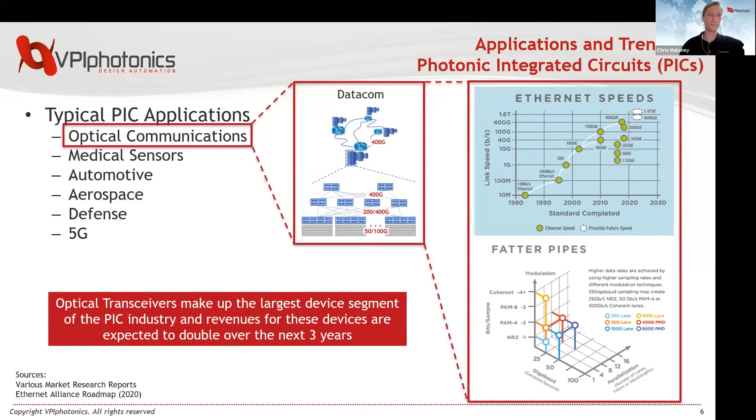One of the main EPDA challenges in supporting the PIC ecosystem, as outlined by the Integrated Photonic Systems Roadmap, is that we need to improve the maturity of the foundry PDKs. This requires an orchestrated effort between foundries like Infinera and software vendors like VPIphotonics. Foundries should be implementing more of their design, process, and test information into PDKs, which is exactly what we've done here, and at the same time be working with the software vendors to improve tools and flows to support design for manufacturing and improve yield and cost.

We like to think of our collaboration between Infinera and VPIphotonics as in phase, so we're constructively interfering with one another. Both of our companies are domain experts in optical communications. Infinera is very vertically integrated with systems and networks, and this domain has been VPIphotonics' bread and butter, if you will, for over 20 years. One of the most important things that makes this partnership work well is our focus at the circuit and the system level. This enables fast and simple simulations for PIC designers. If you're a designer, you don't necessarily need to know the device physics behind each and every component.

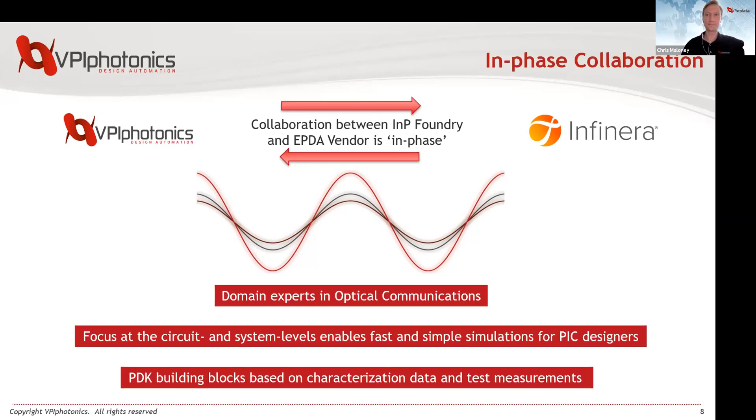So now that you have some background on what motivated our partnership, I'd like to turn things over to Dr. Gloria Hoffler, and she will discuss a little bit more about the Infinera indium phosphide PIC foundry and discuss how you can get involved there. So with that, I'll stop sharing my screen and turn things over to Gloria.

Thank you, Chris, for that kind introduction. Let me now give you a little bit of background first on Infinera, and then describe our PIC capability. All right, there you go.

So we are Infinera, a US-based optical network communications company. We're founded in 2001. Our optical network solutions address very diverse markets, ranging from subsea and long-haul, metro, and access. And our products have a global reach with tier 1 service providers, internet content providers, enterprise verticals. We have over 2,000 patents in a portfolio.

And our commercial success is really in large part and continues to be due to the high degree of vertical integration that we have. As a business, we are organized to leverage synergies of these multiple technical competencies that we feel are necessary to deliver high performance and reliable optical engines for different markets.

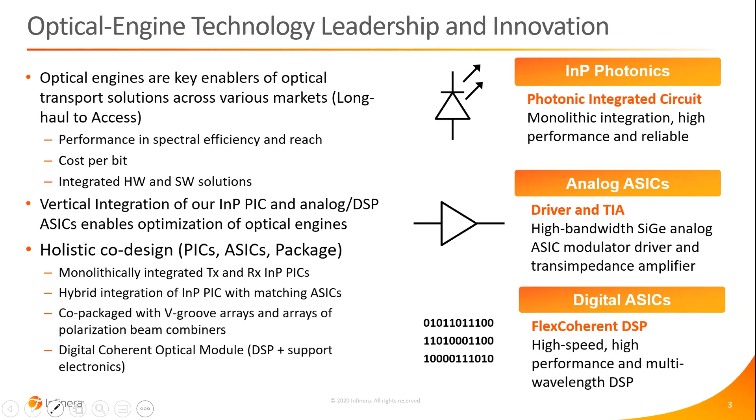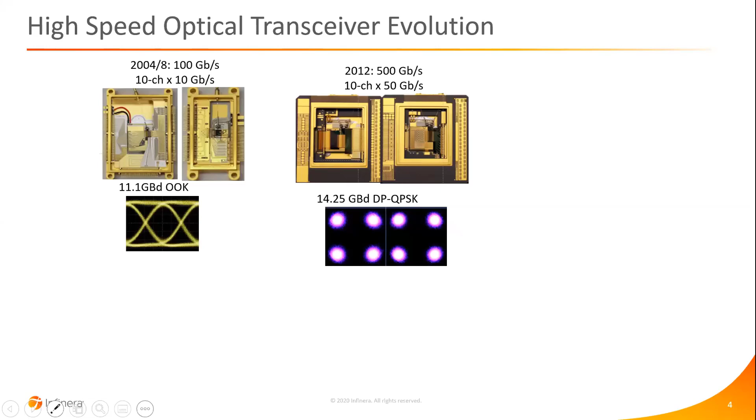So if we look at the evolution of our transceivers, at Infinera, we have pioneered the use of large-scale photonic integration into the network since 2004, starting with a 10-channel, 10 gigabit module. And then as we moved into coherent modules, we integrated 50 gigabit 10-channel modules and deployed those into the network. And these had TX that integrated over 600 functions monolithically on an indium phosphide chip.

So by continuing to increase the baud rate and the modulation formats, as Chris showed earlier, to achieve these larger pipes, the density of the integration of our transceivers really increased. In 2016, we demonstrated a 1.2 terabit module with a 200 gigabit per lambda PIC, and then went on to demonstrate 2.4 terabits with 600 gigabit PICs in 2019.

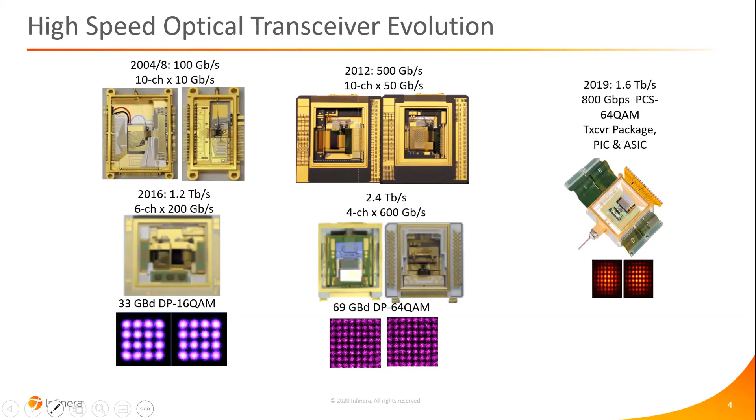And then most recently, our latest optical engine, which is 1.6 terabits. And these are 2-channel PICs, which for the first time integrated all the transmit and the receive optical functions onto a single indium phosphide chip. And each channel is running at 800 gigabits per second.

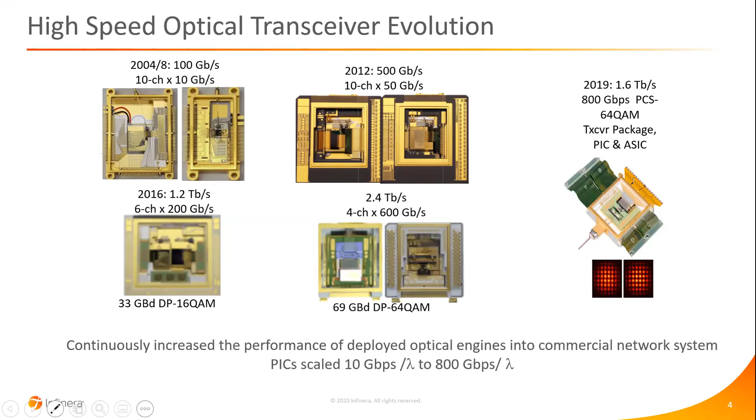So these PICs are developed in a commercial fabrication line, and that fabrication line is now also accessible through a foundry capability. And so the same fabrication line that produces these leading edge commercial PICs was tailored to provide the foundry PDK that you'll hear about today. The development of the integration platform at Infinera is very similar to the development of electronic ICs.

We start with the manufacturing capability, and once that capability is mapped out, we put in place fab processes with very tight CPKs and use end-of-line tests from the product lines to correlate performance and verify the design rules. SPC metrics are used in all the product lines. Process capability is also used, and this is a measure of the repeatability and consistency of our manufacturing process. These capabilities are tracked and controlled to deliver high fabrication yields and meet performance metrics.

Over 90% of the processes have CPKs larger than 1.33. We've reported many times yields over 90% on our wafer fab production lines.

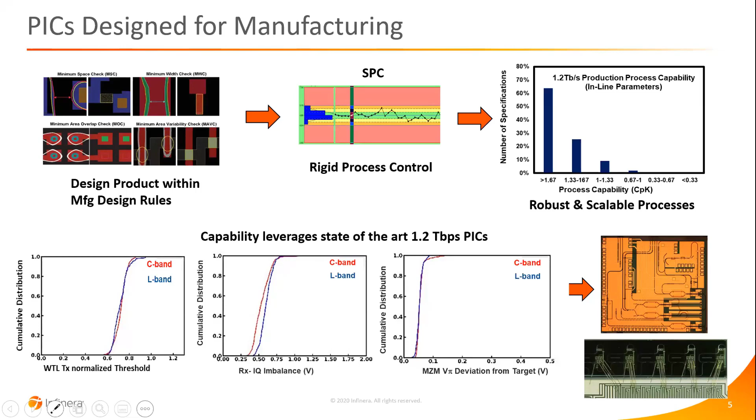Beyond the process design rules, we also need to look at the scalability of the process. Improvements in the fabrication capability have reduced the density of killer defects, which enables the integration of PICs with larger and larger complexity and a number of functions. This is really important, as if you think of a PIC yield, the yield is not just determined by meeting the performance of a specific channel metric, but it also needs to perform across all the different channels.

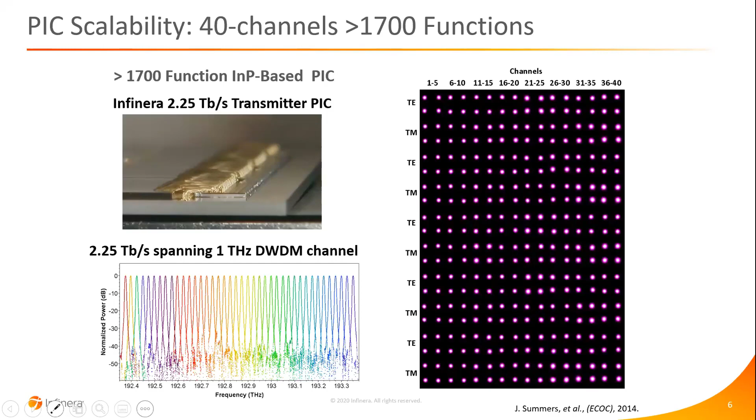To demonstrate the performance on the channels, I'm showing this QPSK constellation, and you can clearly see the TE and the TM constellations for all 40 channels. This is a 2.2 terabit capability 40 channel transmitter that's been all monolithically integrated in indium phosphide.

So let me now highlight the components of the PDK and the capability of the integration platform. We offer lasers that are fully optimized in the platform. These components are all centered at 1550 nanometers. The DFB lasers can run CW or directly modulated.

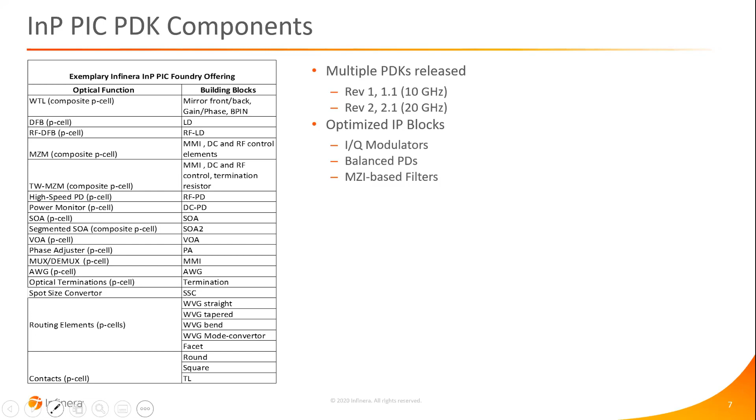We also have in the kit DC and RF photodetectors. The first release operated at least at 10 gigahertz, followed by a second release with a capability of 20 to 25 gigahertz. We offer on-chip amplification, power and phase adjusters, and a 10-channel AWG, all integrated in a low-loss optical integration platform. What you see here is a micrograph of the chip, the wafer payload from one of our MPW runs. As I mentioned before, we use a system-centric approach to design all these components.

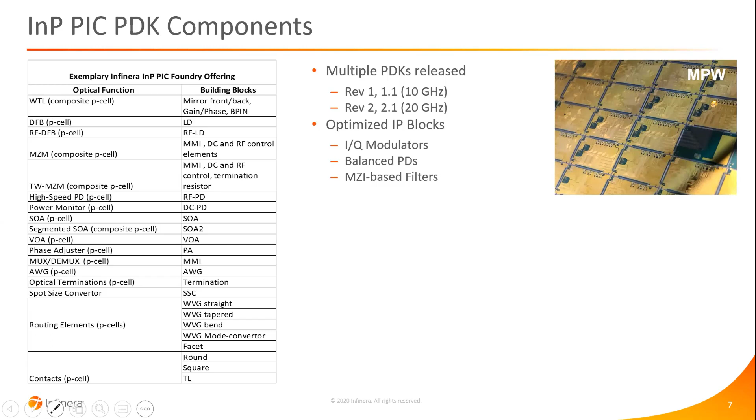These are components that are compatible with off-the-shelf electronics and assembly requirements. They're also really intended to operate as best in class, so they stand out well when compared with standalone components. This particular laser is a widely tunable laser that came from a verification chip that was embedded into the MPW, and the line width is 200 kilohertz. It's comparable with standalone widely tunable lasers.

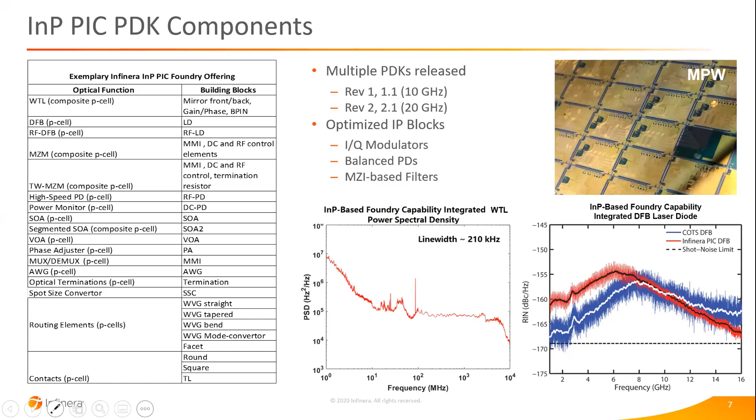We've also collaborated with external groups to test some of our components, and I'm showing here the RIN characterization from an integrated DFB laser. The comparison here is made between a commercially available off-the-shelf DFB that is typically used in RF photonics and the Infinera laser. The commercial line also provides a wealth of statistical data to build compact models. Eugene will be describing that after my talk.

To enable this turnkey capability, we partnered with VPIphotonics, which helped us chart a path for allowing users to prototype and move on to commercialization very quickly. We developed the infrastructure to maintain the foundry line in our commercial fab and use design automation to perform simulations and PIC layouts. We've generated data to build compact models derived from the foundry, not just based on our foundry runs, but also on statistical distributions from our commercial lines.

Interoperability is also really important between these tools, and that was part of the joint collaboration we had with VPIphotonics. This really reduces the learning cycles. Eugene will talk about the netlist export capability today, which allows us to take the simulated PIC schematics and readily bring them into a layout environment, in this case Cadence, allowing us to quickly move from simulation to layout to fabrication and delivery of the PICs. So I'd like to thank you for listening to the foundry capability, and really look forward to working with you in the future.

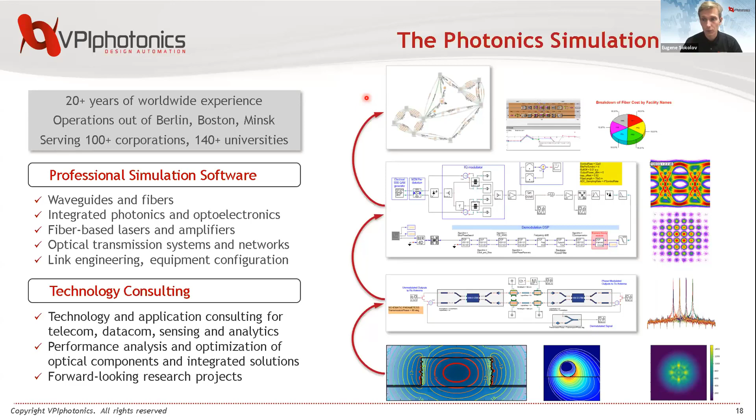We have a very diverse range of customers, among corporations, as well as universities and research institutes. We offer multiple software tools covering different applications and levels of abstraction, and you can see a few examples on the right. We start from waveguide and fiber design, going up to photonic integrated circuits and systems, and all the way up to networks. We also share the knowledge we've gathered over these years and take active part in several forward-looking research projects.

But for this particular webinar, we are going to focus on these tools: VPI Component Maker Photonic Circuits, and the extension to it providing the library of building blocks for the Infinera indium phosphide foundry PDK. At this level, one would have access to more physical representation and more physical models of the integrated photonics components, while another tool, VPI Transmission Maker Optical Systems, will focus on the entire optical systems. You'll see the difference in a minute when I show the demo.

But what's important is that all three could work perfectly well together because they share the same user interface, called VPI Design Suite. Now, if we talk about integrated photonics design, the main challenge is that we may have a very diverse set of basic photonics building blocks. Some of the models should be really advanced in order to capture all the effects, and there are other challenges too. We need to deal with both electrical and optical signals, and our signal propagation should be bidirectional, so that we can account for back reflections in our integrated photonics, or counter-propagating signals interaction, and so on.

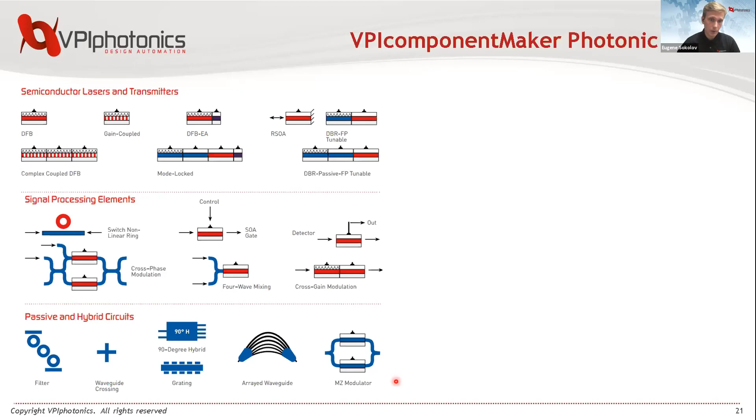So in order to address these and other challenges, we created the product called VPI Component Maker Photonic Circuits, and it can be used for a really diverse range of applications. As an example, we can see here a tunable hybrid silicon laser.

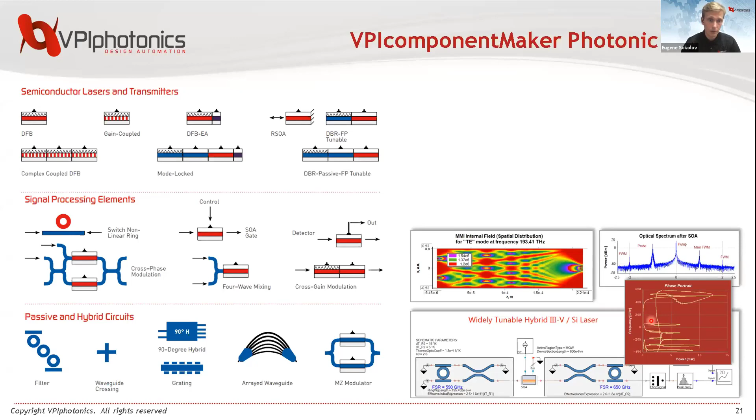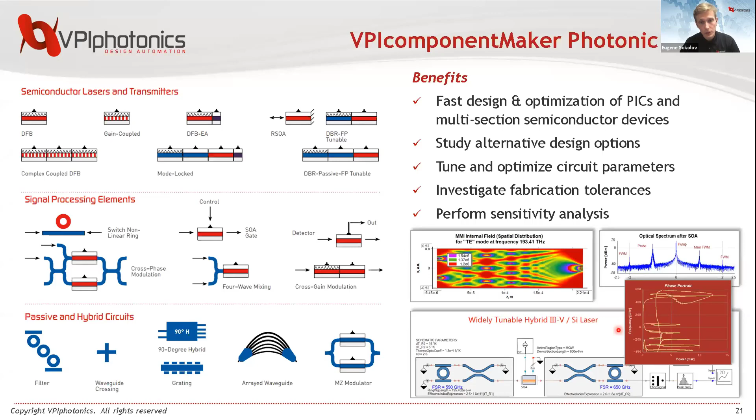It's also important that one can not only design and study alternatives of your designs and solutions, but also do design optimization of these devices and circuits to investigate fabrication tolerances and perform sensitivity analysis.

As was already mentioned today, one of the main trends and desires of the integrated photonics industry is to simplify access to design and manufacturing of PICs, and to lower the cost. This could be achieved by increasing design predictability and enabling very easy scalable design of highly integrated circuits, speeding up the design cycle and reducing time to market.

Following the paved path of electronic IC designs, foundry-specific process design kits are widely introduced to address these needs. So what is the PDK? In the first place, it is a list of optimized and predictable components which the foundry could fabricate. Further, the PDK contains corresponding compact models, and these models are fast, analytical, or behavioral models which capture the actual behavior of the devices fabricated on the foundry.

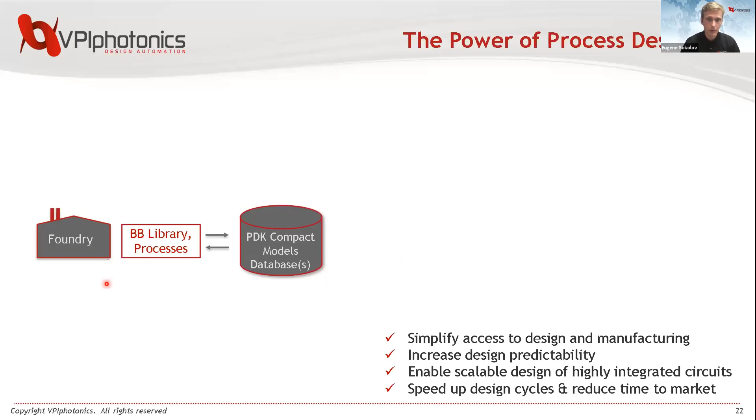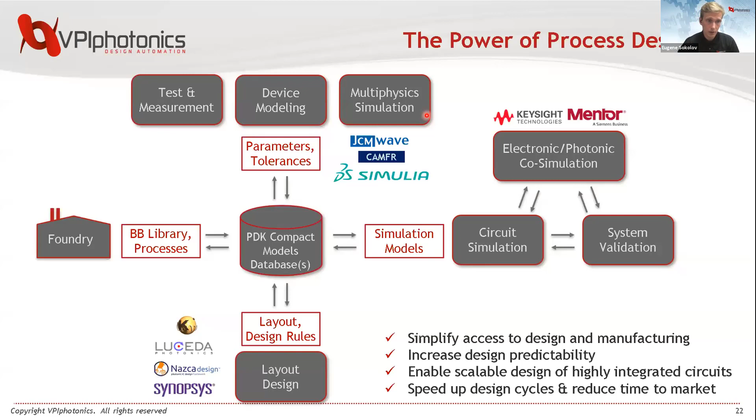Simulation models require the parameters to be set, and this information is usually delivered by performing device, multiphysics simulation, and by test and measurements. The models themselves are already implemented in some circuit-level simulation tool.

We propose a few tools which fit in this ecosystem. But what is most important is that this ecosystem proposes high interoperability of different tools. So what does it mean?

For example, you have a circuit or your schematic, and it could be quite easily converted into multiple layout tools, your favorite one, or just a netlist, as we will see in the future. Further, your circuit simulation could be combined with system or electrical simulation quite seamlessly. And depending on the task, all of these interfaces could be really important.

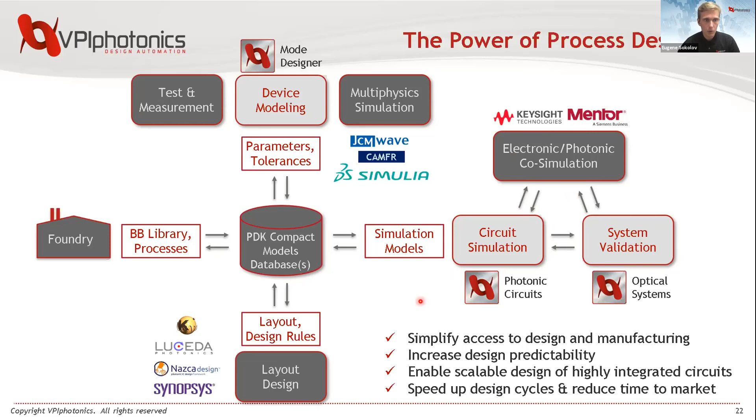Switching to how this ecosystem works, in the particular case of the Infinera PDK, we should note that Infinera Foundry does a tremendous job simplifying their customers' life. Infinera accurately performs testing and measurements of their devices, and we use this information to characterize PDK compact models.

In this workflow, users don't need to worry about their PICs layout—Infinera takes care of that as well. Passing your abstract design idea after simulation would be as easy as sending a netlist, which is automatically generated from your schematic.

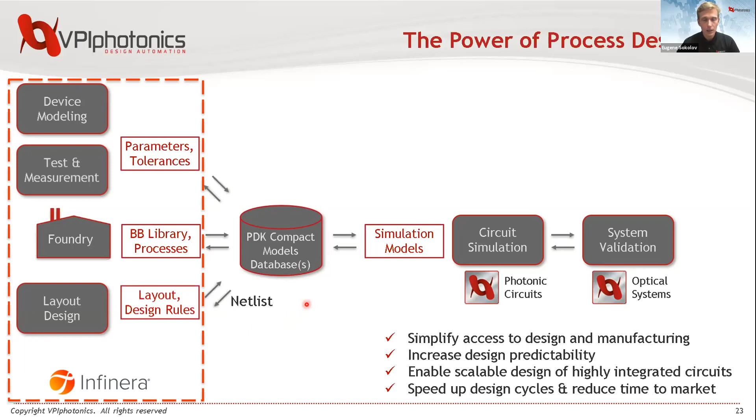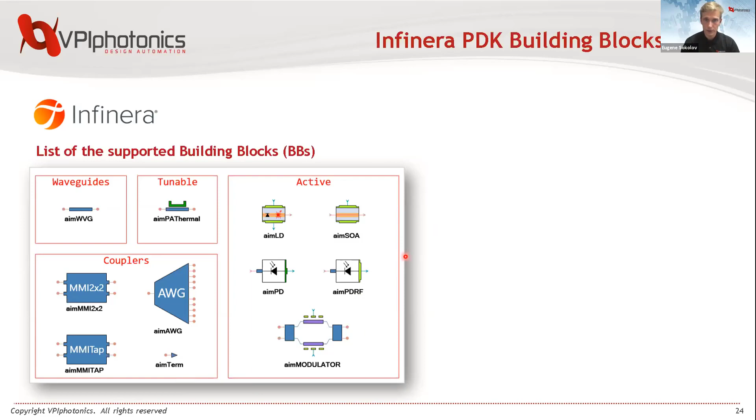We use our built-in system-level models and tune them accurately, and depending on the nature of the components, different methods and simulation models could be employed.

It's important to mention that using measured and experimental data is really essential, because we have more trust for more complex designs afterwards. One can also extend the library with their own custom co-simulation models.

Now let me give a few examples of how we characterize the simulation models. In a very simple case, the measured characteristics could be read pretty much directly. For example, passive devices are completely characterized with their scattering matrices.

As in the case of this arrayed waveguide grating, which is commonly used to multiplex or demultiplex optical signals at different frequencies, we can just read the scattering matrix in some specific format.

In other cases, the measured data could be processed before it is applied to optical signals in the simulation. As an example, we can measure the response of the RF photodiode and approximate it with an analytical low-pass filter. The parameters of this low-pass filter are calculated quite easily by a simple fitting procedure of actual experimental data. In both cases, the models are pretty straightforward and use foundry data almost directly.

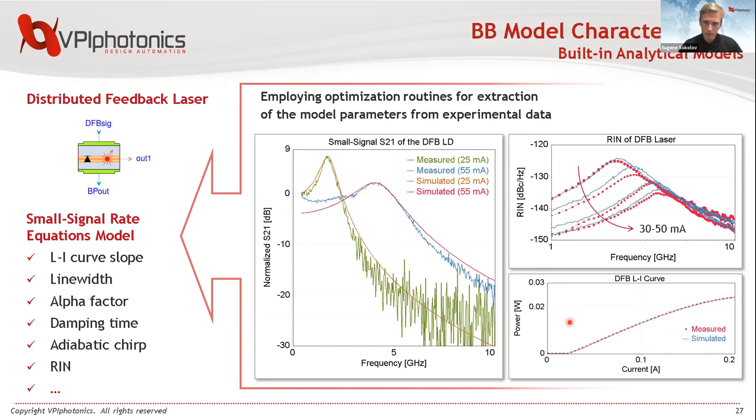So on the plots here, we can compare an LI curve for the DFB laser diode, small signal amplitude response, and relative intensity noise spectra. And we can compare the measured and simulated results. And again, even with more complicated procedures, the simulation gives us sufficient accuracy.

Shifting gears, let's see how all this works together in a live demo for a 16QAM system based on Infinera PDK building blocks. And for this purpose, I'm going to switch to VPI Design Suite. So to start with, let me introduce the VPI Design Suite interface and the main elements that we will be talking about in the next few minutes.

So VPI Design Suite provides a dedicated visual photonic design environment. And this allows you to create an abstract representation of your system or circuit, which we usually call a schematic, and run the corresponding simulation without any programming knowledge. So it's very easy. Any schematic consists of interconnected building blocks, usually representing different devices.

And on the left here, we can see the navigation bar where one can access a library with numerous modules, for example, providing the models for laser sections or for the integrated passive components. So we use these general purpose models to create the corresponding library of the Infinera PDK building blocks. And this library is also provided as an extension or toolkit, and it can perfectly work together with all general purpose components stored in this library.

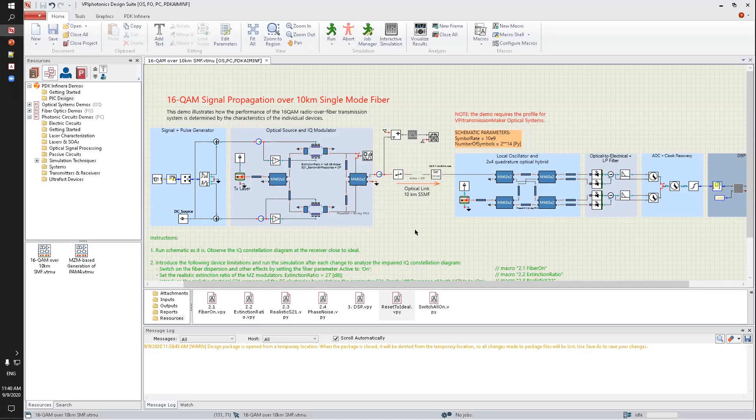So this is an example of 16QAM signal propagation over 10 kilometer fiber. And I'm not going to dive deep into the principles of quadrature amplitude modulation, or QAM format. Importantly, this system contains the typical parts of any optical link. So it has a transmitter, it has the link itself, usually represented by a fiber, and it has a receiver with some signal processing.

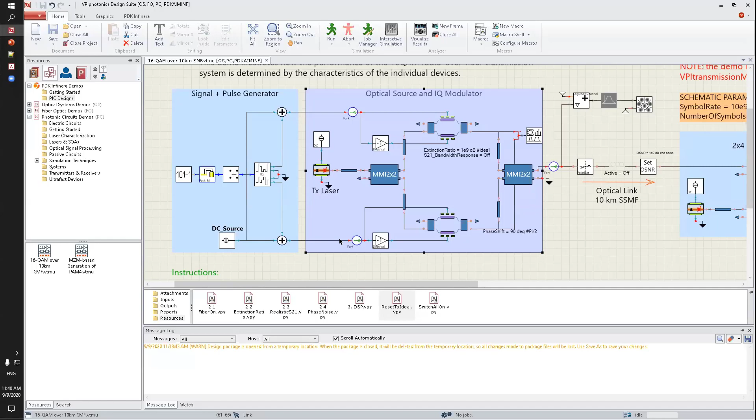So if we have a look at the transmitter, we can distinguish electrical and optical parts, and while the electrical part is represented by the general purpose modules emulating electronic components, the optical part consists of Infinera PDK building blocks. So let us have a little closer look at them.

And so here we have two bit sequences driving a dual parallel Mach-Zehnder modulator. So it's basically two Mach-Zehnder modulators, which are standard Infinera building blocks embedded into a main Mach-Zehnder structure. The continuous wave emission of the Infinera DFB laser is modulated by these modulators, and since there is a phase shift in one of the arms, we can form in-phase and quadrature data streams.

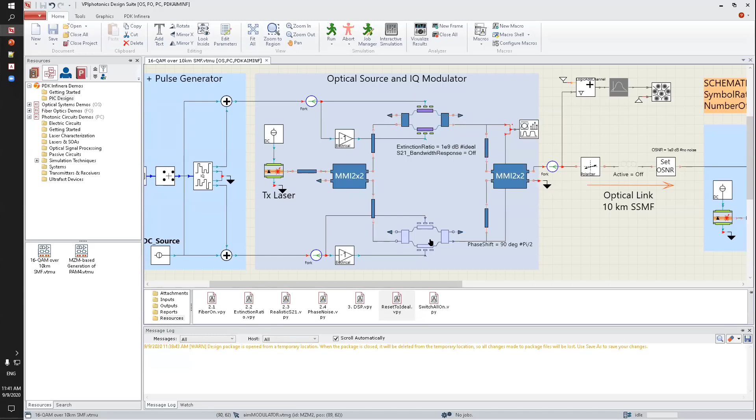So we can open the parameters of one of the modulators. And once again, since this modulator is part of the Infinera PDK building block library, the model is already pre-adjusted so that it reproduces the functionality of the real device. And because of that, there are very few parameters to control and to set up. And this is an advantage, because it makes it very easy to use such components.

So for example, we can control here the heating power, emulating the phase shift change in the thermal phase shifters. We can adjust the extinction ratio, simulating some fabrication tolerances, for example, and we can switch on and off some of the effects.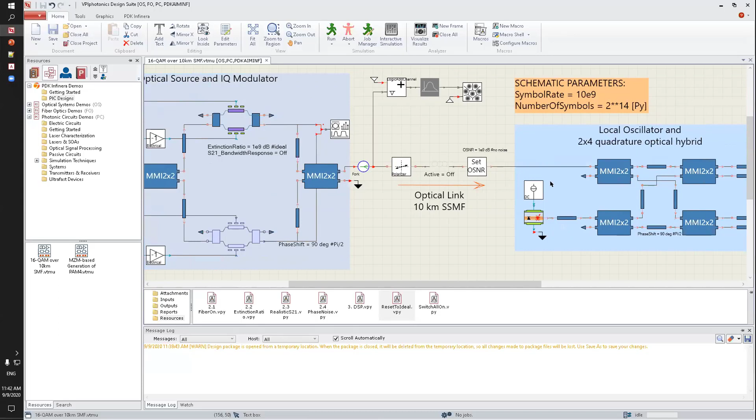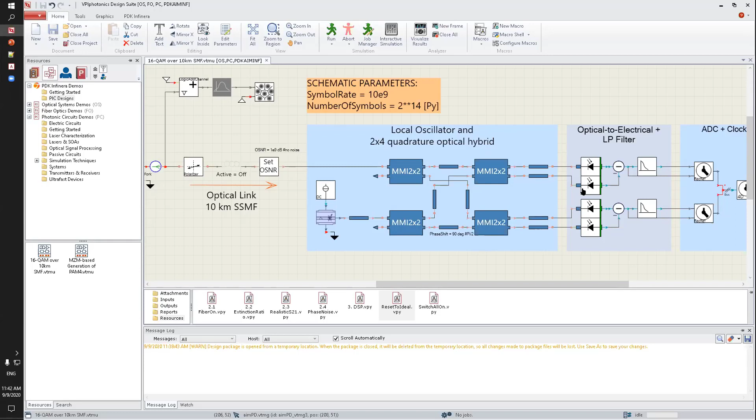So after some auxiliary modules here, we pass our signal to the fiber, and it is further detected in the receiver by superimposing the signal with the local oscillator emission in the integrated 90 degree hybrid. And further, the signal is detected in the photodiodes. And there are also some signal processing tools, which we will discuss a little later.

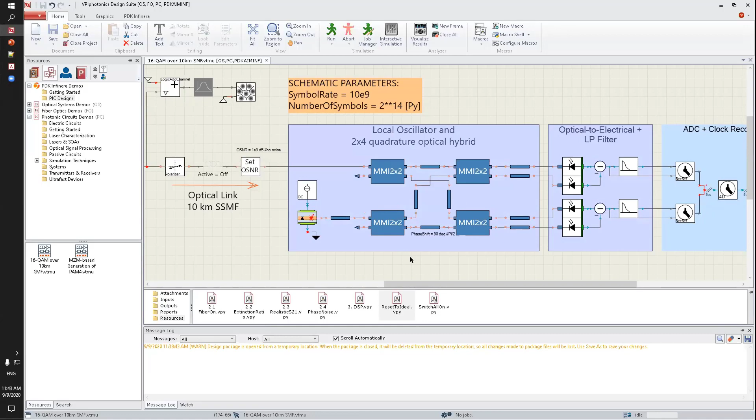Importantly, the same as in the transmitter, the optical part of the receiver is also represented by the integrated Infinera PDK building blocks. Okay, let me run the simulation now. I'll just show you very briefly the simulation. So currently we switched off pretty much all the effects. So we have a very ideal extinction ratio for the modulator. We switched off the fiber and all associated effects. So the simulation doesn't take long. And since all impairments are dismissed, our constellation diagram detected by the receiver is pretty much ideal.

Now let me switch on some of the effects, and to save a little time, let me do them all at once. So I switched on the fiber and corresponding dispersion and probably some nonlinear effects. We can return a realistic extinction ratio of the modulator, and we can also switch on the S21 response of the modulator. And let's see the simulation results in this case.

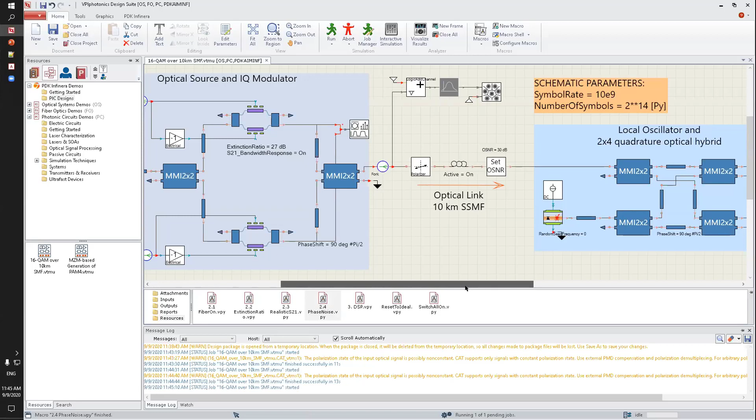So actually the results are shown in the VPIphotonics Analyzer tool. It's a dedicated tool for the analysis and visualization of optical and electrical signals. And now we can see that switching on the impairments in the fiber and in our modulators will affect our constellation diagram significantly. Going a little further, we can introduce phase noise. Because I used a little trick, I considered my local oscillator and the transmitter laser to be completely coherent. And we can see that once this phase noise is introduced, we can hardly distinguish our symbols.

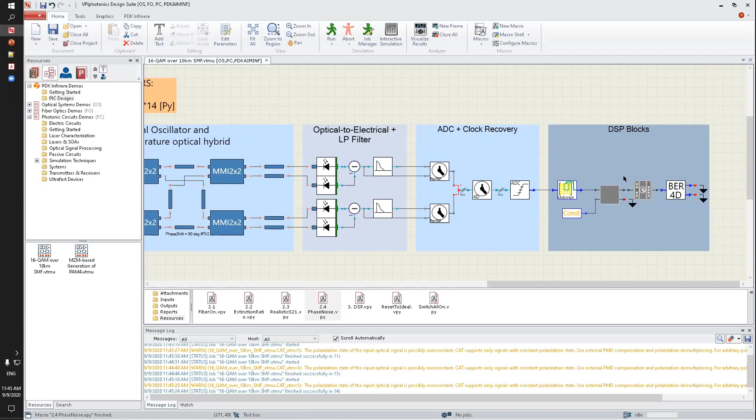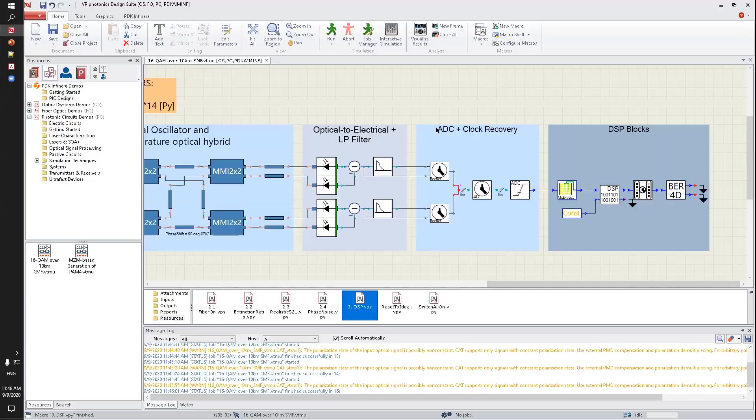How to fix that? We need to introduce some DSP blocks. In our case, we just switch them on. And by the way, I'm using these macros just for setting the parameters. No magic is going on here. So once we activated these digital signal processing building blocks here, some algorithms for phase recovery are applied, and we can see how these algorithms can improve our constellation diagram, and our symbols can be distinguished pretty easily again. So please notice again that these DSP components are from the optical systems tool, while these are from the Infinera PDK building blocks library. And this shows very high interoperability of different tools and components.

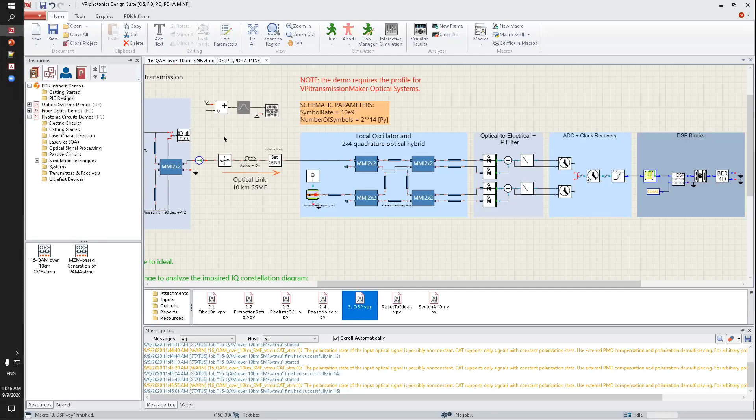So it was a very simple example of the analysis which an optical designer could perform. Once he's happy with that, he can export the schematic into the netlist and pass it to Infinera. And for that, we have a dedicated script here. So let me save this path and finish. So we can obtain this netlist, which could be further passed to Infinera.

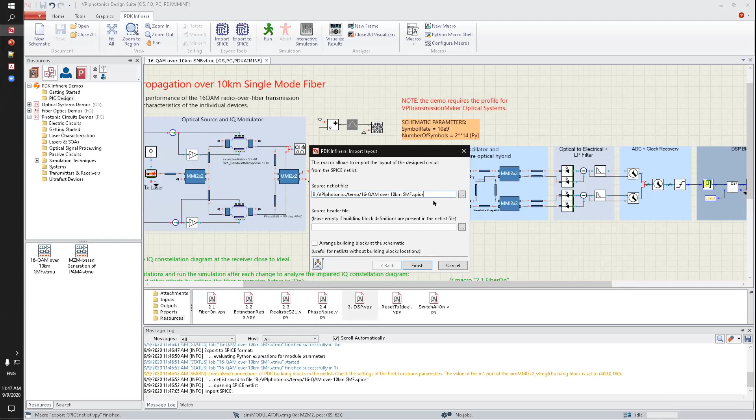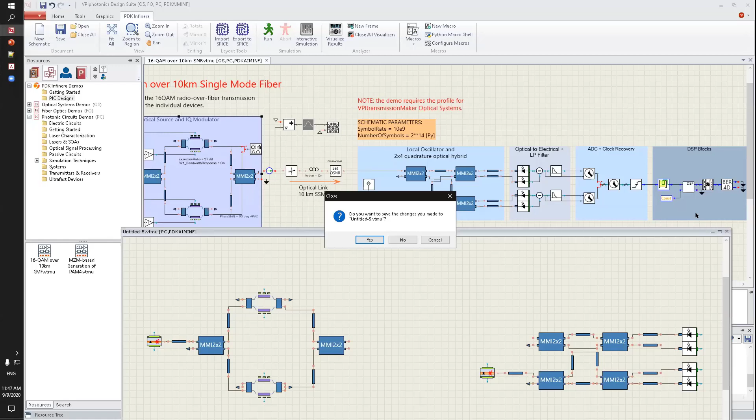Even more, we can import the netlist, so we can go the other way around. For example, if in the foundry Infinera made some changes and we want to check if the circuit still operates properly, we can automatically generate the schematic from the netlist. Surely it will not include any general purpose components such as fibers or digital signal processing tools, but only the components related to the Infinera PDK building blocks. But a regular workflow would be providing the generated netlist to Infinera for subsequent import to layout tools, and ultimately taping out the chip.

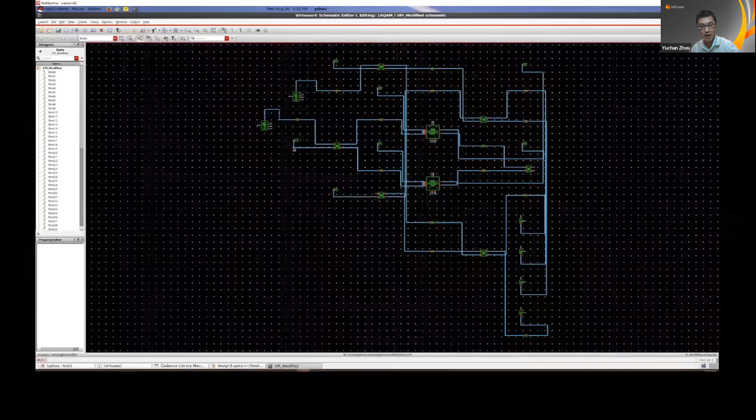Next, by implementing our internally developed scripts through hitting a shortcut key, the location and rotation of each component will be updated according to the parameters provided in the netlist file. As we can see here from the updated schematic in Cadence Virtuoso, the circuits are all as the user constructed in the VPIcomponentMaker, where the key circuit construction information can be imparted to the Infinera team seamlessly.

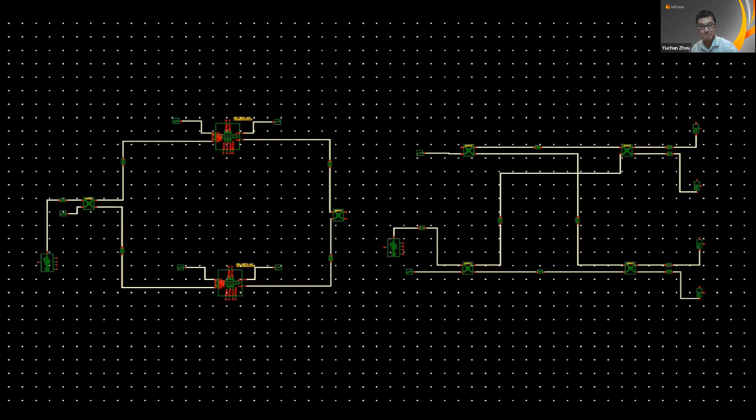So as a turnkey foundry, Infinera does provide a full suite of standardized devices, so users only need to provide the PIC schematics without the need to design their own devices, since Infinera already has fully optimized IP blocks ready to use. And we will take over from the finalized schematics all the way to produce a final functioning chip.

And during and after the fabrication, through testing on the integrated test device structures on each die from the MPW foundry run, we have the capability to make sure of the successful realization of all the active and passive devices and optical links requested by the customers.

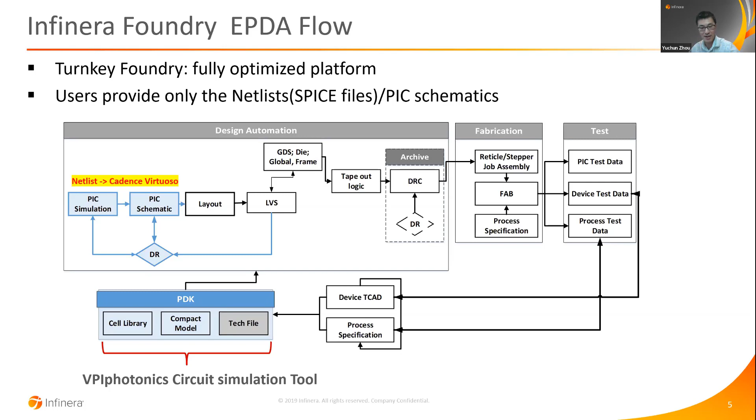Again, the performance of the components and the PIC is quite competitive with the state of the art of the indium phosphide foundries around the world. And we currently provide a full set of requisite components for both TX and RX applications.

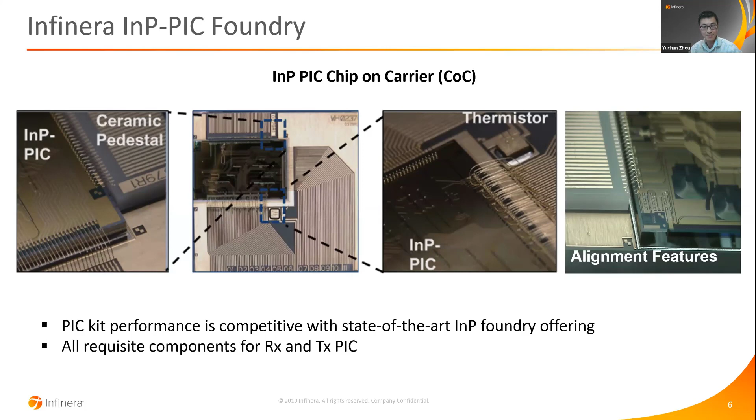So far, we've introduced what Infinera's EPDA and the foundry process flow look like, and in terms of the cycle time, as long as the PIC design has been verified by both the foundry customers, who are in the meantime VPIphotonics customers in this case, and the Infinera team, from PIC fabrication all the way to COC delivery is usually within 4 months. And starting from 2019, we have already successfully finished our first MPW foundry run and delivered the chips to a few foundry customers already.